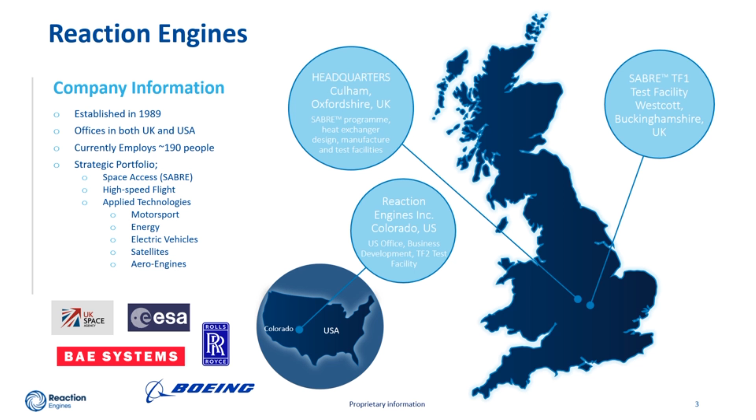Additionally, I should mention some of our key partners, including BAE Systems, Rolls-Royce and Boeing, who we are very proud to be working with and very excited to see some of the great ideas starting to emerge from these relationships.

So, to introduce SABRE, let's take a look inside and familiarise ourselves with what it is, the different systems involved, and how it operates. The SABRE is a single propulsion system design which combines jet engine and rocket engine technologies. You will see some of these technologies that are common to gas turbines at the front, but also technologies more associated with rockets at the back of the engine. Both of these systems work together to create an air-breathing rocket engine.

Unlike a pure liquid rocket engine, which carries both its fuel and oxidizer on board the launcher, SABRE allows us to burn its fuel using atmospheric air during the first part of the ascent trajectory. As such, SABRE is intended for winged launch vehicles with horizontal takeoff and landing. In this air-breathing mode, air is captured at the air intake, which during supersonic flight speeds decelerates the air back to subsonic inside the nacelle.

The airstream is then split into two, with some of the air supplied to the core air-breathing engine in the centre, and the remainder through a bypass duct and burner system around the outer perimeter at the base of the engine. The air-breathing core is very much like a gas turbine, and uses a turbo compressor to supply high-pressure air to the main combustion chamber. The engine operates in air-breathing mode during the initial part of the ascent trajectory, up to an altitude of around 26 kilometers and a flight speed of Mach 5.

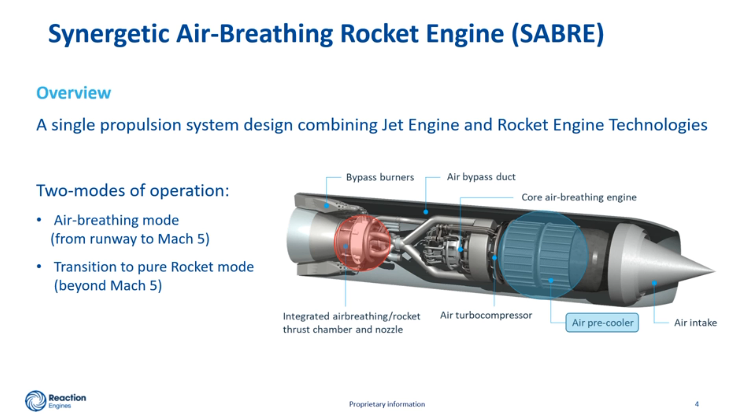This provides the air-breathing core engine with a single, stable design point, whilst enabling it to operate up to flight speeds around double that of current air-breathing engine capabilities, however still using relatively conventional and well-proven jet engine technologies. Beyond Mach 5 and at higher altitudes, SABRE transitions over to rocket mode, reverting to a pure liquid rocket engine, drawing upon a separate but now reduced demand of liquid oxygen stored on board the vehicle. However, both engines use the same integrated air-breathing and rocket nozzle.

If we look at the cooling cycle used to achieve this, we can see how the engine works thermodynamically. The engine's fuel is cryogenic liquid hydrogen, here shown in purple, which is stored at very low temperature and is used as the overall heat sink for the cooling cycle. The pre-cooler is able to continuously remove heat from the air through the use of a closed circulating loop of high-pressure helium, shown here in green. The helium transfers heat indirectly from the high-temperature airstream at the pre-cooler to the low-temperature hydrogen.

The SABRE cycle is actually able to usefully exploit this large temperature difference by imposing an internal heat engine cycle between the high-temperature heat source and low-temperature heat sink, using the helium as a working fluid to drive the air-breathing engine's main turbocompressor and helium circulator turbines.

At lower flight speeds, and for example from takeoff, when the intake air temperature is much lower, the heat input by the pre-cooler is substituted by a separate heat exchanger and pre-burner to top up the temperature of the helium circuit. This provides a near constant turbine operating point and simplifies the overall design and performance modelling of the engine, and turns the problem of the hot air into a solution to benefit the overall system design.

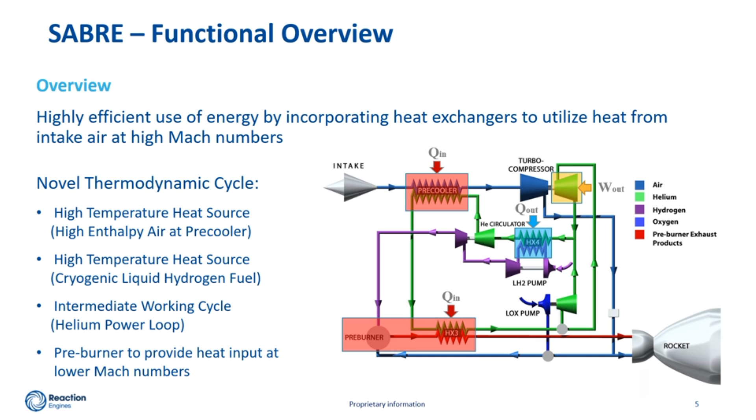So summarising the engine's operation, at point 1, high-speed air entering the engine heats up as it decelerates to subsonic speeds. At point 2, the air pre-cooler cools the high-temperature intake air to near-constant compressor inlet conditions. At point 3, the core engine compresses the airflow and rejects heat to the liquid hydrogen fuel via a closed helium loop. As the cooling cycle ultimately rejects its heat to the hydrogen fuel, for SABRE, the demand for fuel flow as a coolant exceeds the fuel flow that is required for stoichiometric combustion.

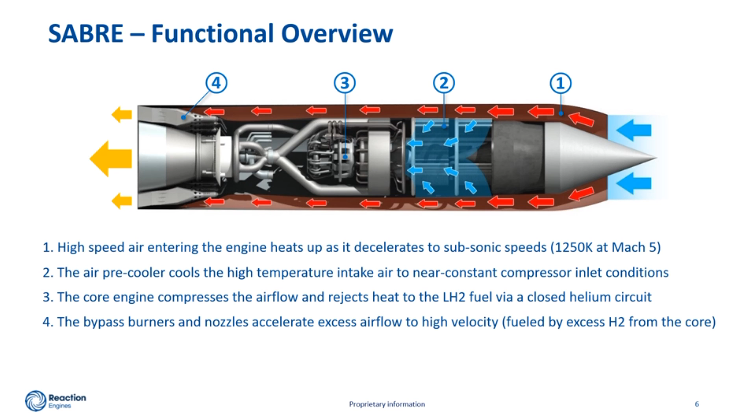So at point 4, a bypass burner system is used to burn the excess hydrogen with additional air captured by the intake. At point number 5, a separate rocket engine is used for flight speeds beyond Mach 5, which allows the vehicle to operate up to orbital velocities. And at point 6, the air-breathing and rocket engines are integrated together using a common nozzle.

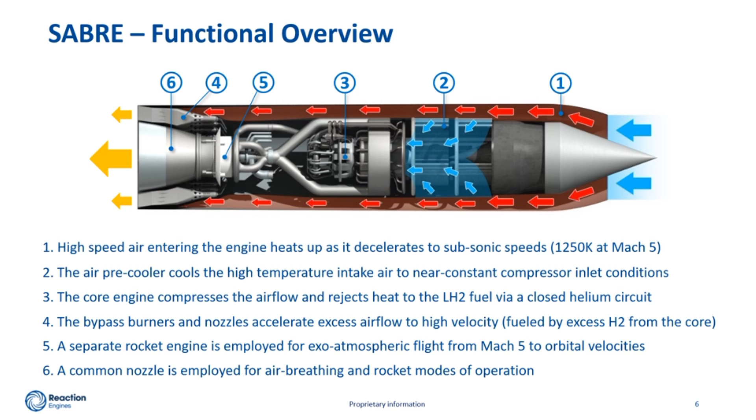So what SABRE gives us is the efficiency of a jet engine where we need it, but then also the performance of a rocket with vastly improved characteristics over a wide speed range. When you compare SABRE against other engine classes, you can see that it has a very good air-breathing specific impulse across a large Mach range, but also an extremely competitive thrust-to-weight ratio across all operating modes in a single integrated design, making SABRE a perfect solution for accelerating a winged vehicle from zero forward speed on the runway up to the high altitude and velocities required for space launch.

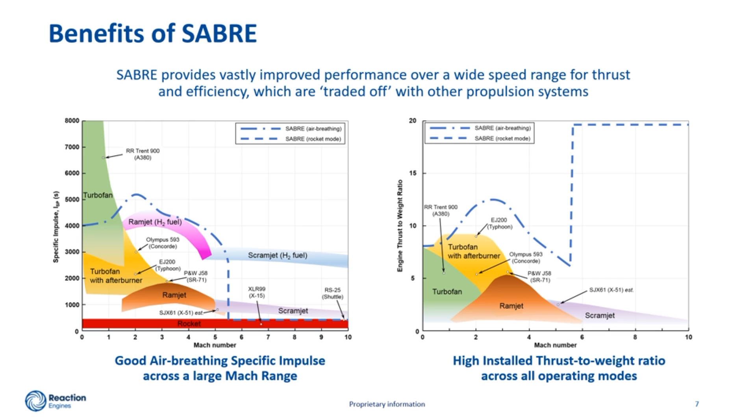So how do these benefits translate into space launch vehicles? Well, the weight saving achieved by introducing an air-breathing capability has a significant impact on the overall launch vehicle design by improving the overall mass fraction of the system, which can now be used to introduce systems such as wings and undercarriage to allow full vehicle recovery. This leads to reduced operating costs and complexity, and an increase in launch cadence between missions, as well as an increased reliability by allowing for a robust and incremental vehicle development program.

Winged vehicles also have a wide mission abort envelope, offering the ability to recover payloads and upper stages in the event of an abort. What's really interesting is that SABRE has the true potential to enable single stage to orbit launches. However, the concept is scalable and can be operated purely as the first stage of a multi-stage system design. As such, SABRE provides a step change in technology for space access, improving on and enabling many disruptive features that are considered highly beneficial to the next generation of launchers, including system reusability, improved mission operations, increased reliability, and the capability to abort the mission and safely recover the vehicle, including its payload.

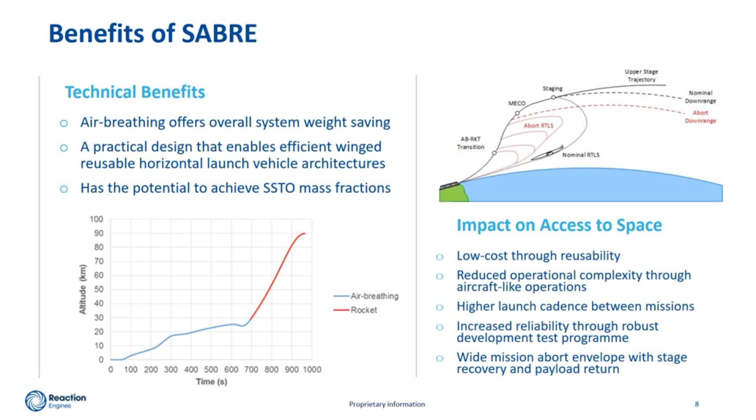So, turning now to the program, SABRE offers a practical development approach drawing upon near-term technologies. Its modular and scalable architecture allows for parallel systems development with an extensive ground test program. This allows us to structure a development program with a sensible approach to risk by working on critical subsystems and technologies to improve their readiness levels whilst simultaneously maturing the overall integration design.

As you can see, the SABRE engine is broken out into three major subsystem groups, including the nacelle systems group, the air-breathing core engine, and the rocket engine systems, which can all be extensively and independently developed ahead of integrated testing. The SABRE program can also draw upon the well-established expertise and facilities available across government agencies, industry, and academia.

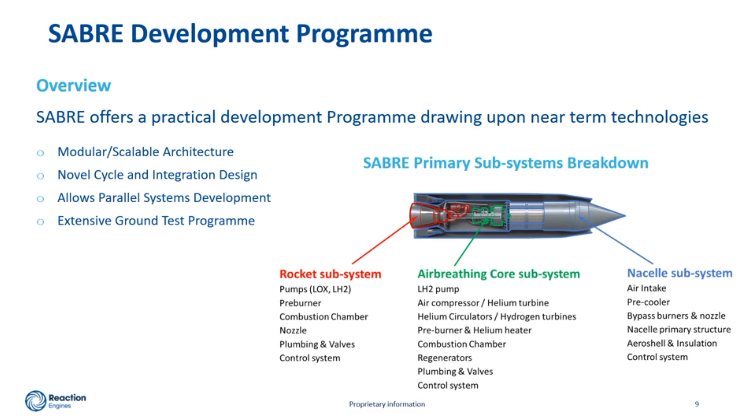Focusing now on the air-breathing core, we are continuously optimizing the flight engine design and have a well-structured subcomponent technology program, leading to an integrated test of several of the critical core subsystems on the ground. This program is referred to as Demo A. I'm pleased to say that we have recently passed a preliminary design review with ESA for this project, and also developed the test facility requirements.

There are also a number of technology challenges which we are working on, along with the support of suppliers and partners to ensure we have a successful test program and ensure the performance and operability of the flight design. However, we would positively welcome you to get in touch if you have any experience in the areas listed.

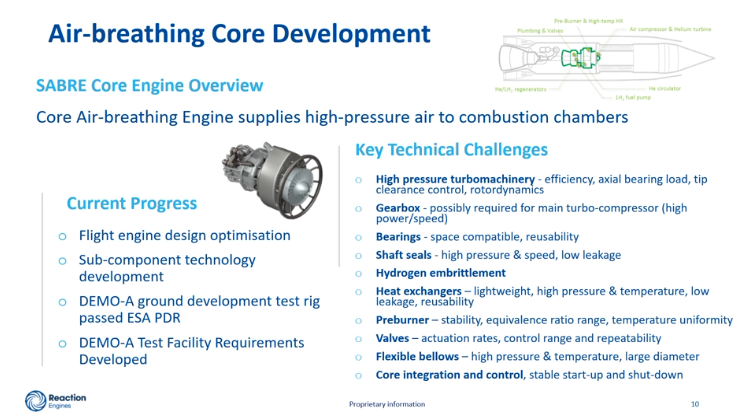So here's an overview of the Demo A program. As you can see, the experimental core engine here is not tightly packaged like a flight engine would be, and this is intended to provide easy access to all the subsystems, allowing us to incrementally test and replace the hardware over a number of builds. What we aim to get out of this program is to develop the core engine technologies and also verify the various performance models and control logic.

It is also important for us to demonstrate a controlled startup and shutdown, as well as stable operation over a wide range of throttle conditions. We also hope to measure the cycle's tolerance to component inefficiencies, but overall just to demonstrate a SABRE cycle in a scaled ground-based configuration. And an additional outcome will be to achieve component technology readiness levels of 4 to 5 at a relevant scale.

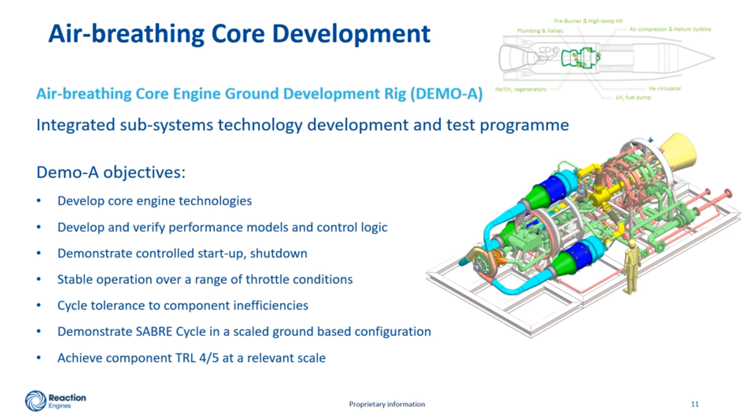Moving on to the rocket engine, Reaction Engines has carried out initial concept design work to understand the design to a level where we can specify the requirements and development needs. However, the rocket systems will ultimately be subcontracted to an experienced rocket engine manufacturer and can be developed in parallel to the nacelle and air-breathing core systems.

The main technical challenges for the rocket are that we are looking for a staged combustion, high-pressure, closed-cycle design with liquid hydrogen. The SABRE rocket also needs to introduce a level of reusability, which is predominantly a challenge for combustion chambers, as well as, for example, turbopump seals and bearings.

The SABRE rocket also shares an integrated nozzle design with the air-breathing engine, which is something we've been working on to de-risk through a series of nozzle design and experimental programs to more clearly understand the performance and critical issues. The rocket engine will be capable of being ground tested to a technology readiness level of around 6 or 7, making use of existing rocket testing facilities.

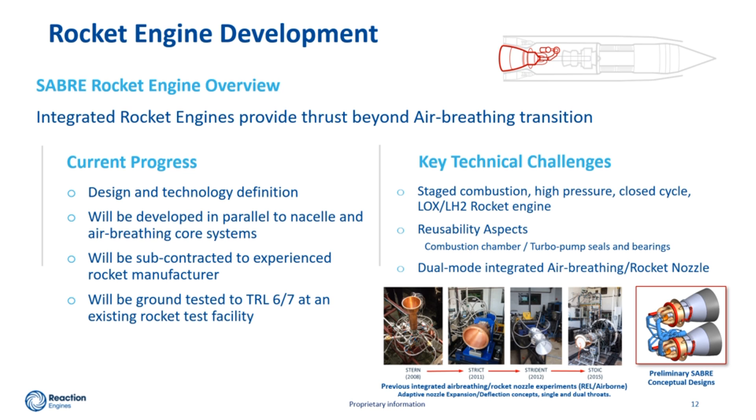The nacelle comprises the overall containment aeroshell, which creates the boundary between the external and internal airflow. The nacelle has the task of capturing and conditioning the airflow into the core engine and bypass system. Several of the nacelle technologies are already being developed on the ground. This work is primarily focused around materials and structures development. However, the air intake and bypass burner aerothermal design is also being progressed through a combination of CFD and wind tunnel testing.

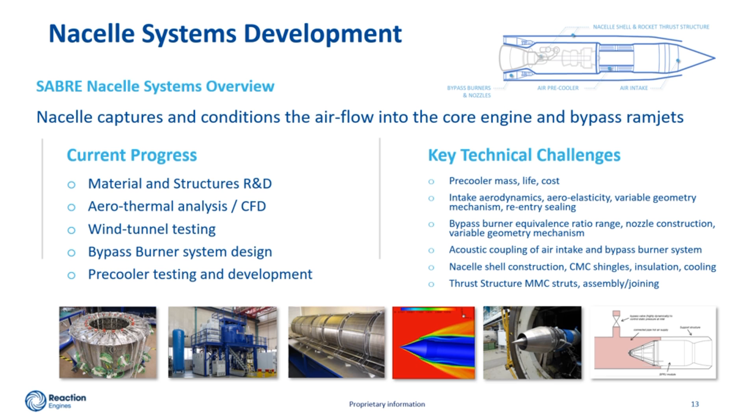Our most recent development on the pre-cooler has been its high-temperature test program, referred to as HTX. The objective of this experiment was to demonstrate the pre-cooler's functional operation at elevated air inlet temperatures and at representative heatant and coolant fluid flow conditions. The objectives of this program were to measure the pre-cooler's performance, get some verification on the mechanical design, and attain further validation of our aerodynamic and performance models.

The target was to achieve the full Mach 5 equivalent conditions on the ground by designing a test rig capable of supplying very high temperature airflow across a physically scaled heat exchanger test article, however maintaining full aerothermodynamic flow conditions representative of its real operating environment.

The illustrations here show the heat exchanger test article core and the containment structure used to direct the high temperature airflow through the core. The test site used a repurposed J79 jet engine to provide hot exhaust gas to around 1000 degrees C, with a mass flow between around 4 to 11.5 kilograms per second. To achieve the range of air inlet flows and temperatures, the J79 was run at a range of different conditions, with and without afterburner running, and compressor bleed mixing with the downstream flow.

Another significant undertaking for this test rig was the requirement for a helium circulator operating at 200 bar and a flow rate of between 1 to 1.5 kilograms per second.

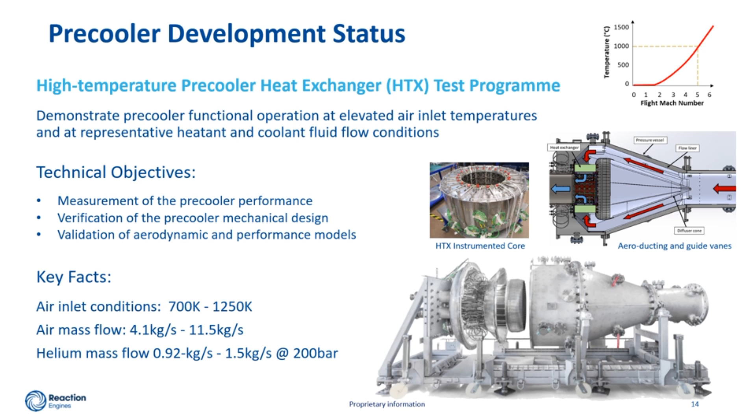The program was one of our most challenging endeavours yet, with the full design and fabrication of the test article hardware being performed in the UK, whilst a dedicated test facility was being prepared by our US team over in Colorado. The teams worked incredibly hard throughout all phases, constantly needing to innovate across all areas of the program to meet their challenging timescales and objectives.

However, I am incredibly pleased to report that the overall program was a real success, achieving all objectives it set out to, and in October 2019 the test team achieved the full Mach 5 equivalent conditions, which represents a critical milestone in demonstrating this technology.

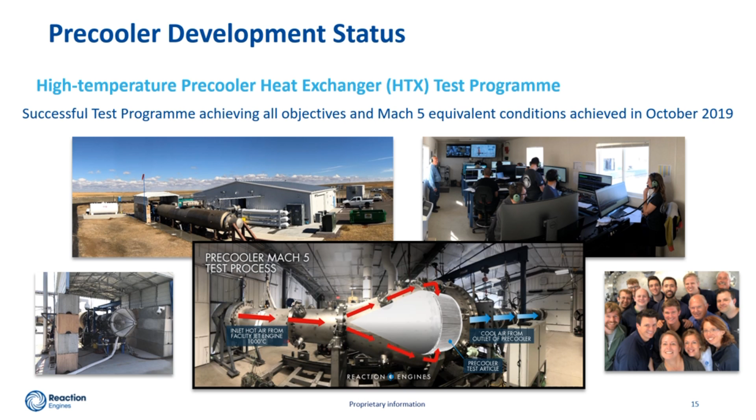The overall SABRE development program is a complex undertaking. However, we are working hard to ensure that it delivers maximum value throughout, addressing the critical technology risks early on, whilst incrementally bringing each of the SABRE subsystems together towards an integrated prototype engine. The program logic has been updated and continues to evolve as we work together, involving our numerous stakeholders and developing the future supply chain. We're committed to maintaining a pace that targets the overall delivery of a product engine to meet the launch market needs of next-generation launch vehicles.

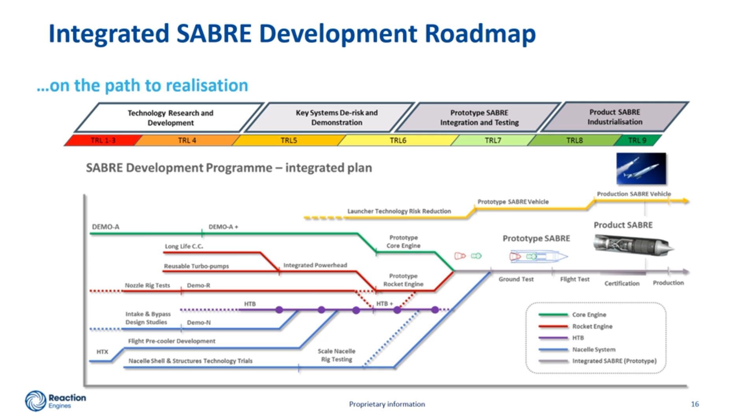One of the next crucial steps for SABRE will be an extension to the current Demo A program to incrementally develop and de-risk the air-breathing technologies towards a flight engine specification. The Demo A Plus program will target a flight-integrated SABRE core demonstrator with subsystems designed close to final SABRE performance specification, aiming to bring all of the core engine systems to a technology readiness level of 5. This program will start with individual subsystem tests before moving to full integrated system testing, initially at part load and then expanding the test envelope to full operating conditions.

The endpoint of this program will result in a core engine that is integrated together in a flight system configuration, with a compact layout using flight engine structures and ducting designs. Following this program, the Demo A Plus core demonstrator can be used as a basis for potential flight testing on an appropriate flight test vehicle, and will also pass on a significant amount of learning and design know-how into the full SABRE prototype core design. We're currently in the process of planning this work and hope to keep you updated as we make progress.

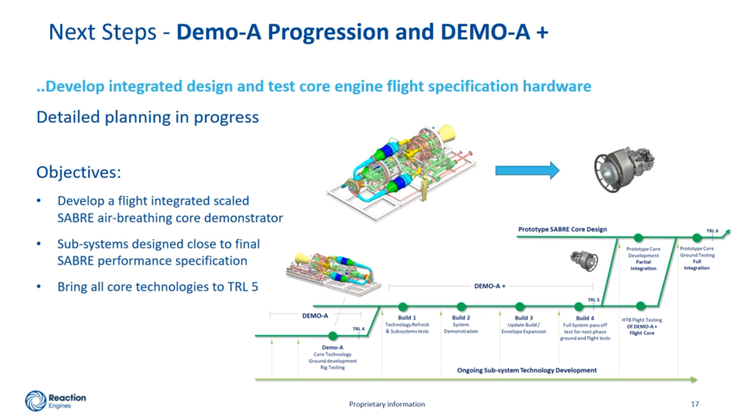One of the key benefits of SABRE is that most of the hardware can predominantly be tested on the ground. However, several aspects of the nacelle design will benefit development in a true representative flight environment. To achieve this, Reaction Engines are undertaking studies to examine the potential benefits of a dedicated flight test vehicle, known as the Hypersonic Testbed, or HTB. The HTB has the objective of de-risking the nacelle systems in flight, namely the coupled performance and operation of the air intake and bypass system. This would be a small and unpiloted experimental flight vehicle which has the capability of being powered by or carrying a small experimental nacelle to the appropriate altitude and Mach numbers for a representative SABRE air-breathing trajectory.

The HTB would follow an incremental development and flight test program, and where possible utilize existing commercial and off-the-shelf hardware. The early part of the program would use a donor gas turbine in place of the SABRE core, and at a later stage may have the potential capability to test a small SABRE core such as the Demo A Plus system as part of a fully integrated small SABRE flight demonstration. Reaction Engines are currently working across numerous studies to explore a number of concepts, looking at both single and twin nacelle configurations with the aim of identifying the overall feasibility and preferred system architectures whilst developing the preliminary requirements. Another attractive feature of the HTB program is that it would provide significant opportunities for the launch vehicle airframe technologies development, as well as offering a unique platform for testing other future hypersonic or reusable technologies.

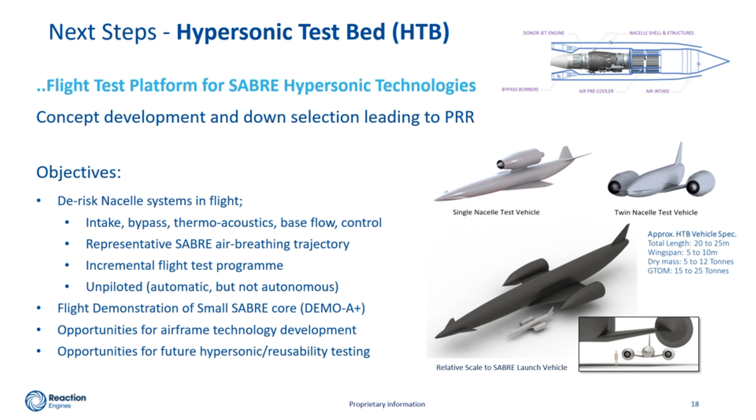And finally, in terms of launch vehicle applications, we are actively engaged in external studies to examine and develop future SABRE launch vehicle concepts and define the final product SABRE engine requirements. These studies are aiming to optimize the scale and performance for both initial entry into service, as well as ensuring the SABRE design is scalable to meet the needs of both the future commercial and institutional launch markets, and are undertaking detailed trades between launch service and operational concepts, as well as the predicted system costs. These studies are also bringing a positive focus on identifying our future partners and the supply chain for the development of the full product engine and vehicle systems.

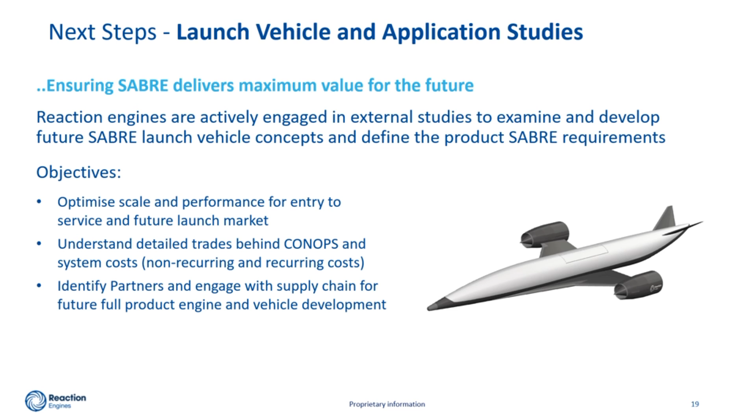So we've now come to the end of this lecture, and I'd like to leave you with a few conclusions. We are rising to the challenge by continuing to mature and de-risk the critical SABRE technologies, and we have positive engagement with UKSA, ESA and other national agencies. We're committed to delivery, with all major milestones to date passed, and we're progressing well with the air-breathing core demonstrator and related technology programs. We're also establishing key industrial partnerships and suppliers for the full development. Finally, we are unlocking the future by optimizing SABRE for the next generation of reusable launchers and identifying wider SABRE technology opportunities.